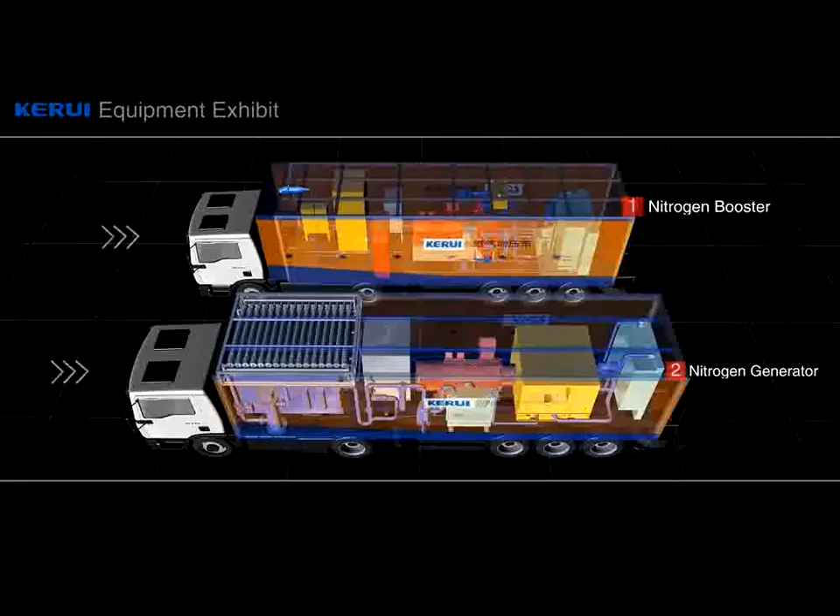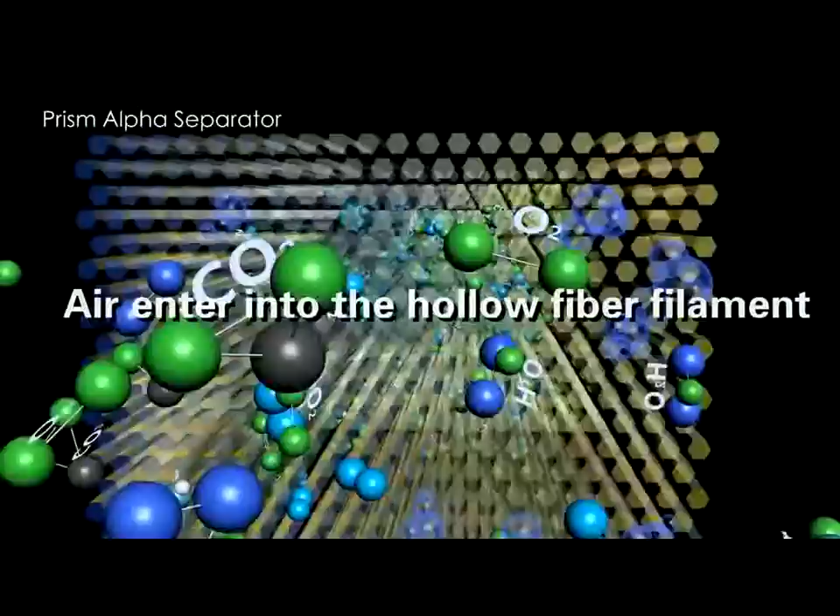Nitrogen generation is realized by means of membrane separation, using the difference in coefficient of solubility and diffusivity of various gases in the hollow fiber membrane to enrich nitrogen from the air. Then a booster pressurizes the nitrogen in certain purity and makes it ready for use.

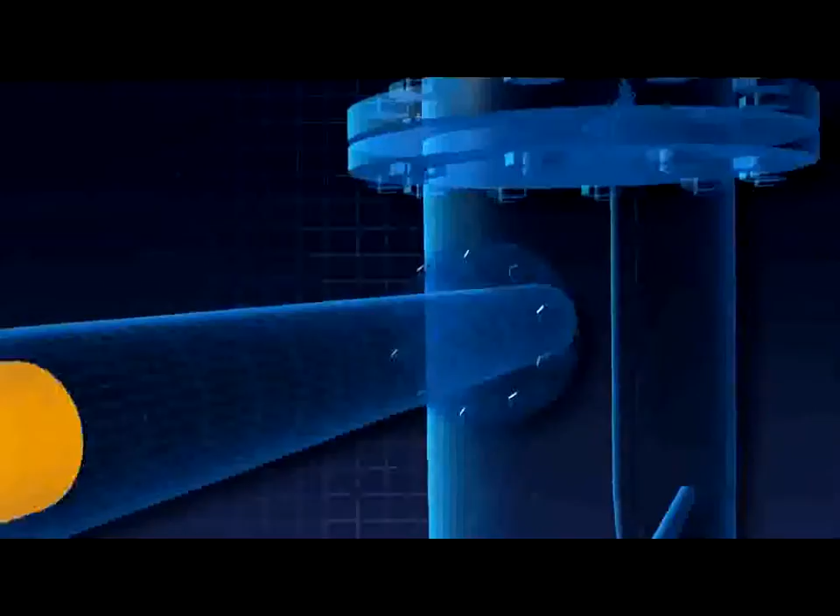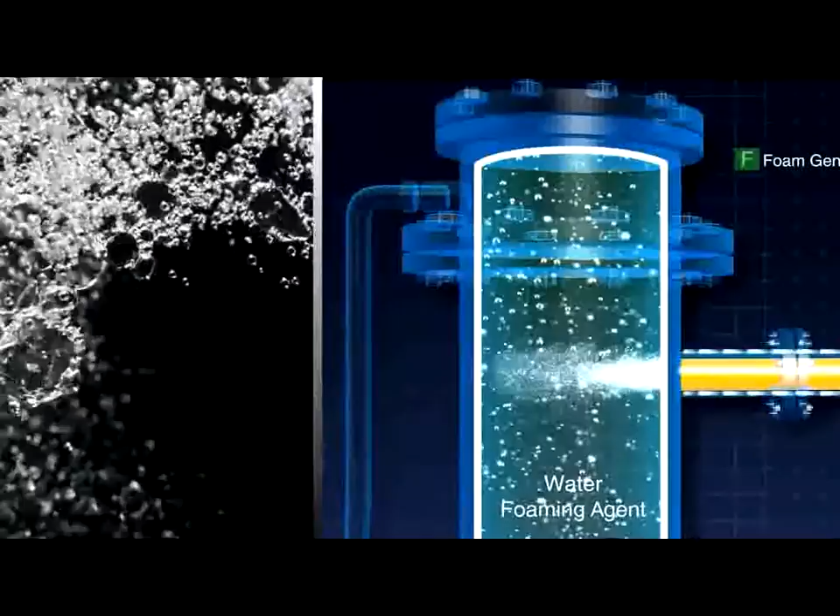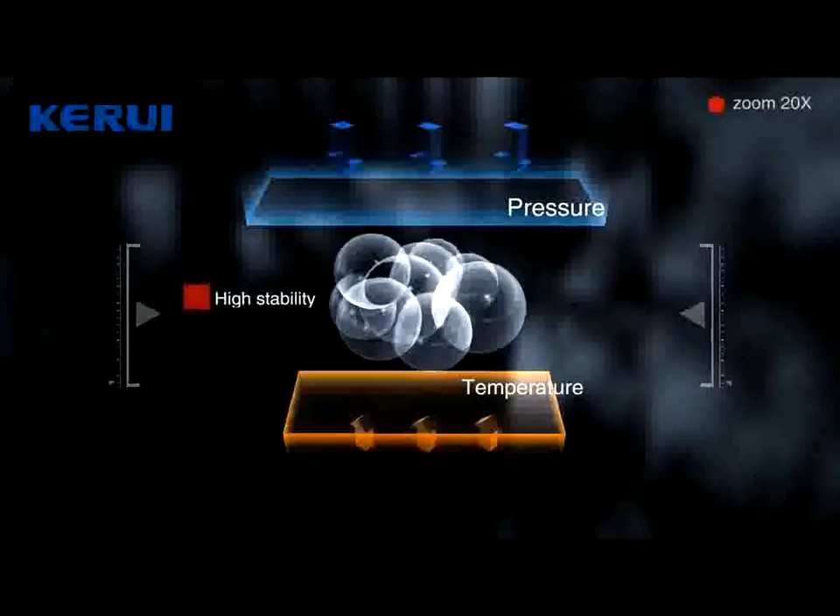High-pressure nitrogen and a foam solution are mixed by a foam generator, which forms a stable nitrogen foam liquid. Nitrogen foam liquid features adjustable density, high stability, little effect from normal temperature and pressure change, high viscosity, good cuttings transportation, shear thinning, and easier plugging of high permeability layers than lower ones.

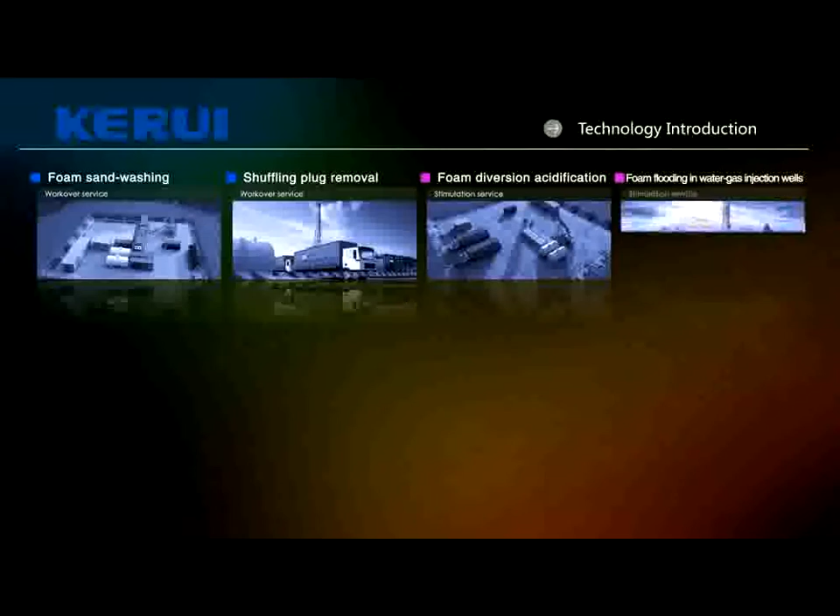Foam decomposes when mixed with oil and keeps stable with water. Easier plugging of water zone than oil zone. Widely used for flow-inducing, sand washing, plug removal, profile control of steam huff-puff well operation, flooding in water or gas injection, foam diversion acidification, underbalanced drilling, ground facility purging, and other field services.

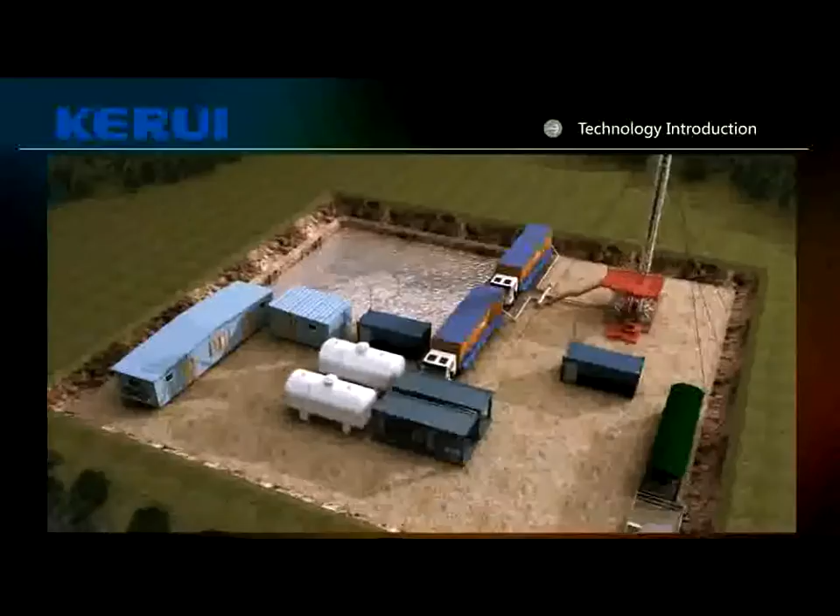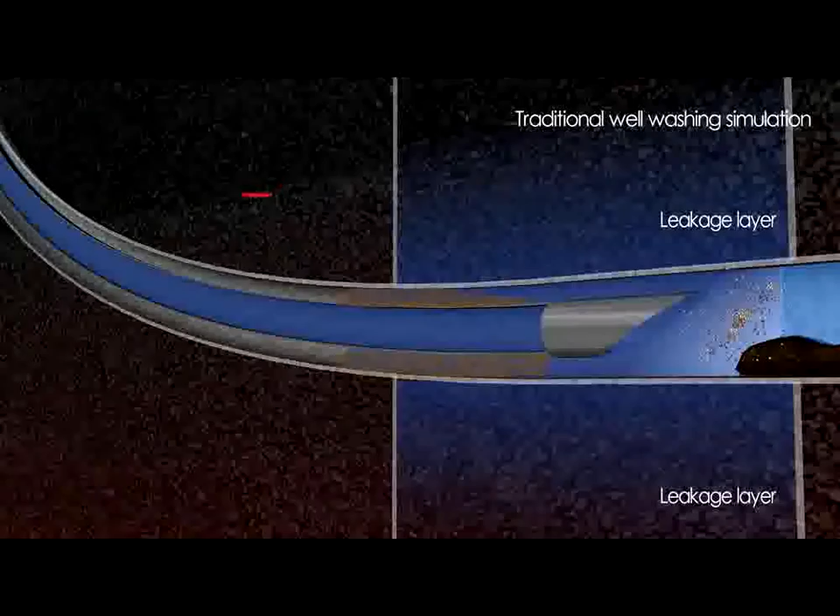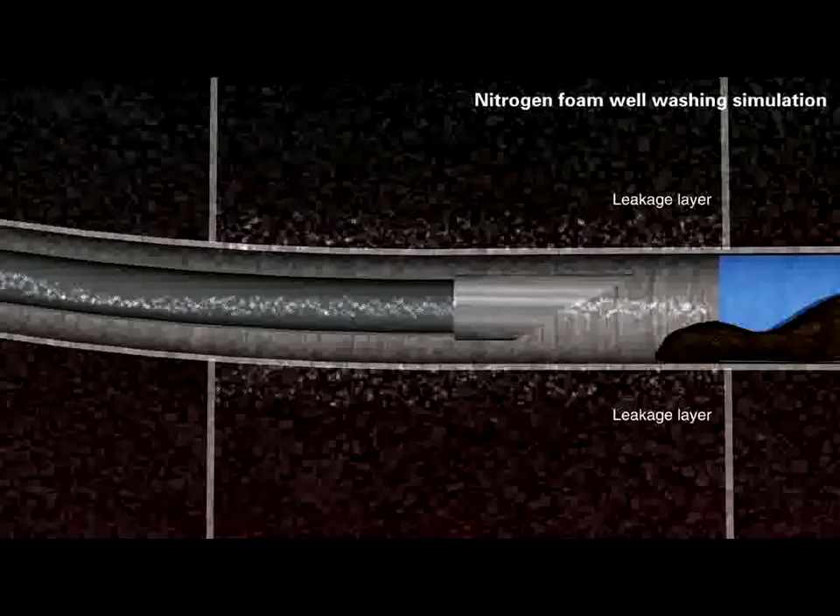Foam sand washing. Severe leakage occurs when using normal flushing liquid in wells with lower reservoir pressure, causing difficulty to establish flushing circulation and leading to sand sticking and other accidents easily. The density of foam fluid is low and easy to adjust. It can successfully establish flushing circulation in oil sleeve and result in less leakage and formation contamination.

The viscosity of foam fluid is high and the frictional resistance is low. The sand carrying capacity is 10 times that of clean water, carrying gravel out of the well bore completely, particularly suitable for horizontal wells sand washing.

Shuffling plug removal. During the exploitation of oil wells, impurities in the formation migrate into the near well bore with the formation fluid, producing blockage that blocks the oil flow channels and causes the decline of production.

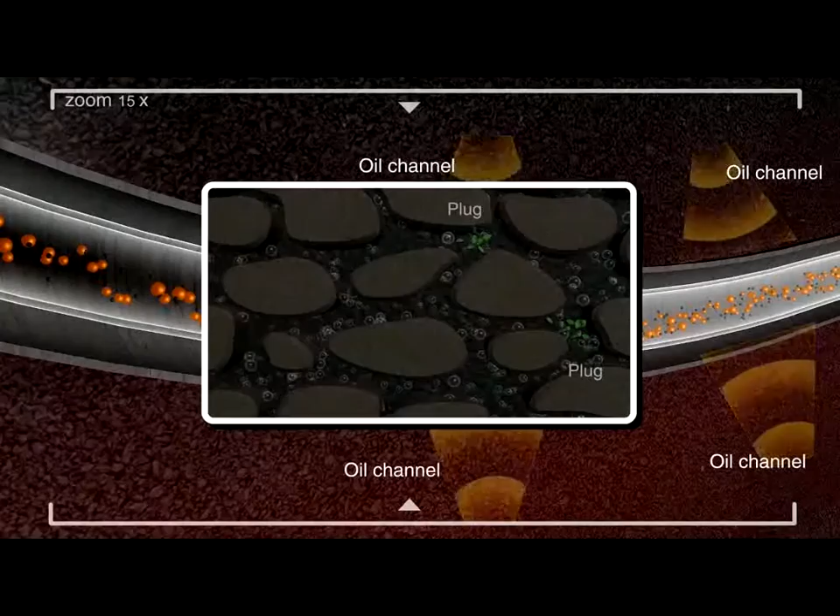Utilize the foam huff-puff and circulation shuffling technology and the low density of foam fluid to establish relative formation negative pressure in the bottom of the well, which could make the formation fluid spray at high speed. Discharge the blockage near the well bore and carry the contaminant out of the well bore using the strong carrying capability of the foam.

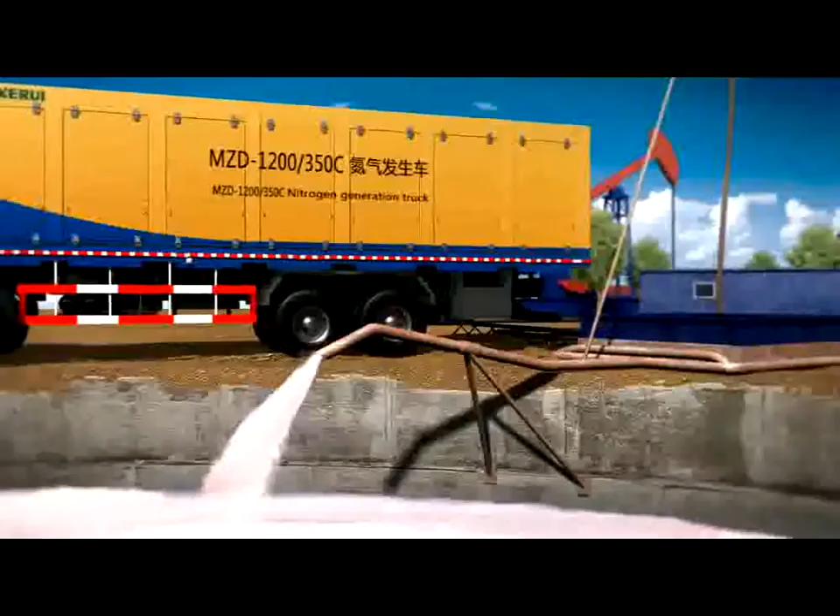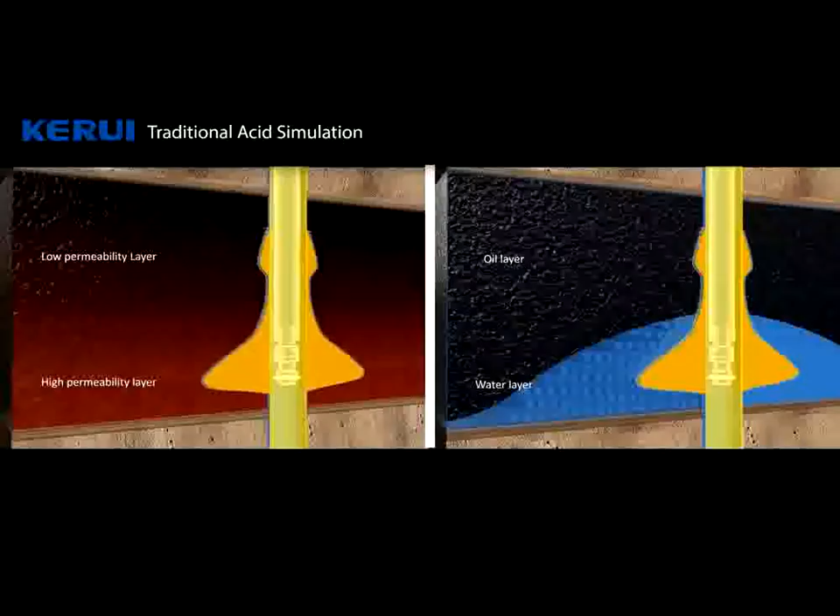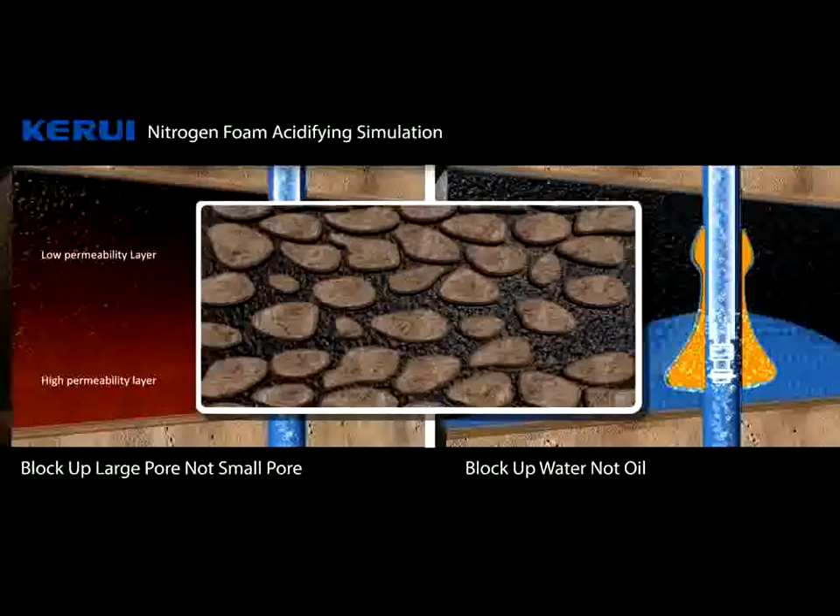Foam diversion acidification. The result of conventional acidification in heterogeneous formation, oil-water coexisting layers, re-acidizing and leakage wells is not satisfactory. Foamed acid has acidification capacity and foam characteristics simultaneously. Plugging big pores, not small pores. Plugging water, not oil. Be selective on different permeability formations and oil-water layers to achieve acid distribution and diversion acidizing.

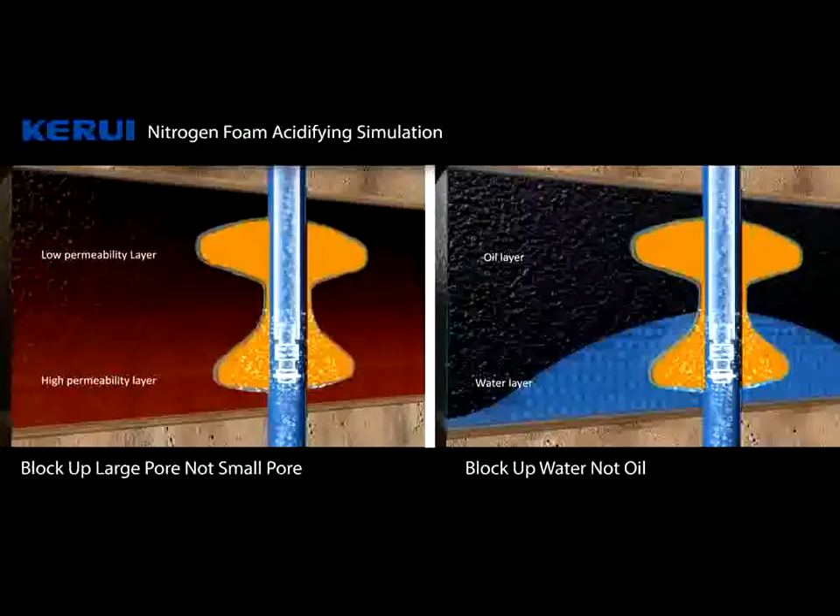The reaction speed of foamed acid acidizing is slow, which could realize reservoir deep acidification.

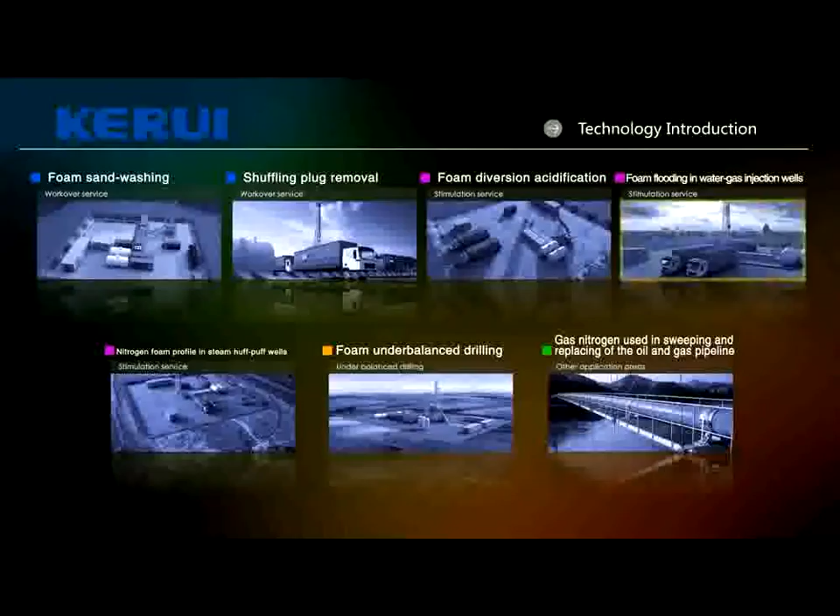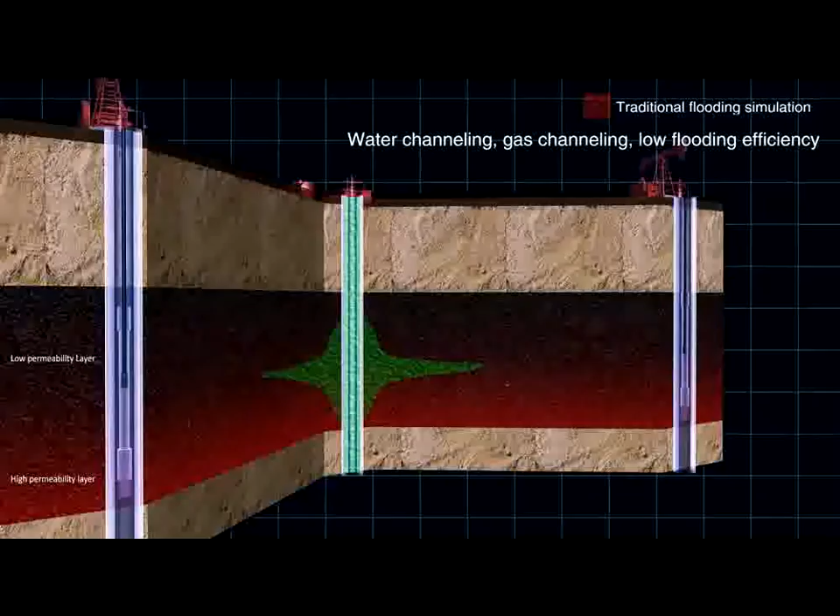Foam flooding in water gas injection wells. The traditional development of water gas injection is likely to cause water channeling, gas channeling, and low displacement efficiency due to the heterogeneity of the formation and the viscosity differences between water, gas, and reservoir oil.

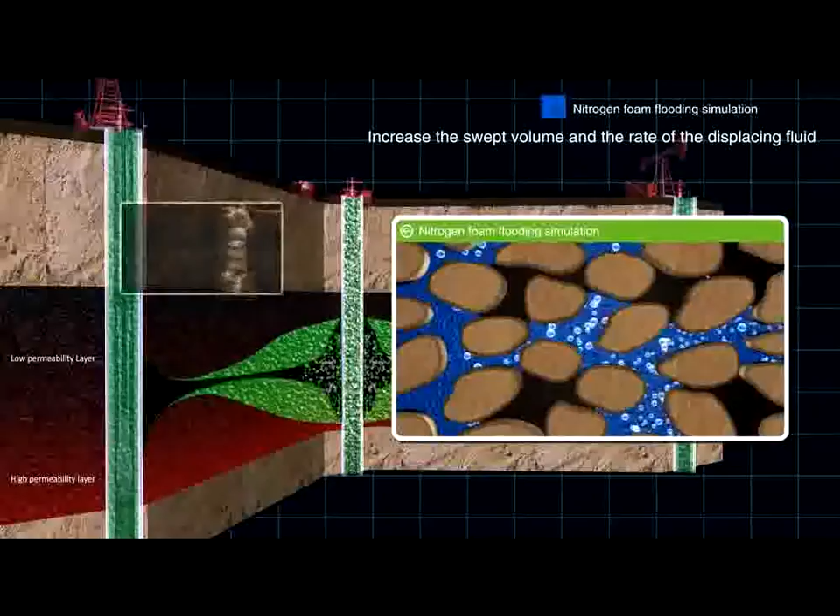Using nitrogen foam flooding can increase the swept volume and displacement efficiency, improve the oil-water mobility ratio, adjust the injection profile, and enlarge sweep volume. Foam defoams when it comes to oil and is stable when it comes to water. It can form a stable jam where the water saturation is high, not plugging the oil flow path.

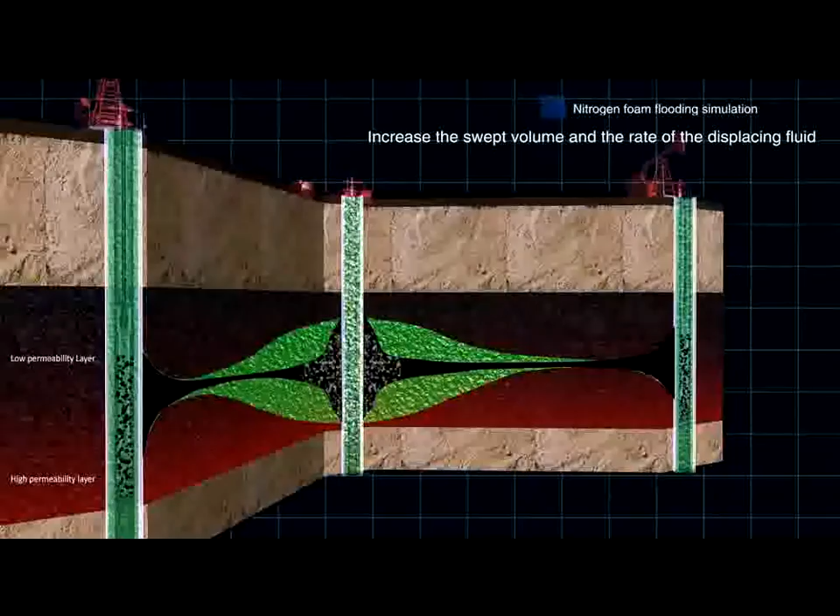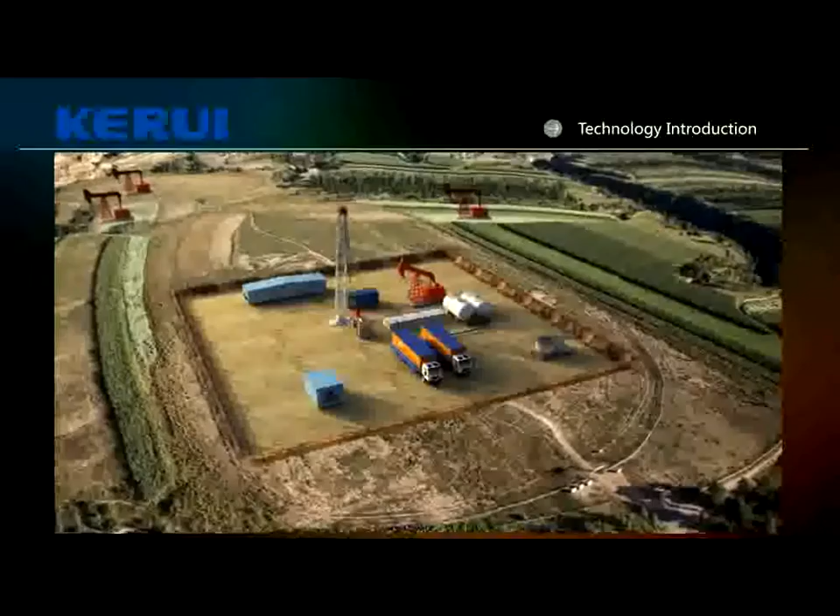Nitrogen foam profile control in steam huff-puff wells. Steam channeling is serious in heavy oil steam injection thermal recovery wells. Influenced by formation heterogeneity, the development effect of thermal recovery is bad due to steam overlay and low steam sweep efficiency.

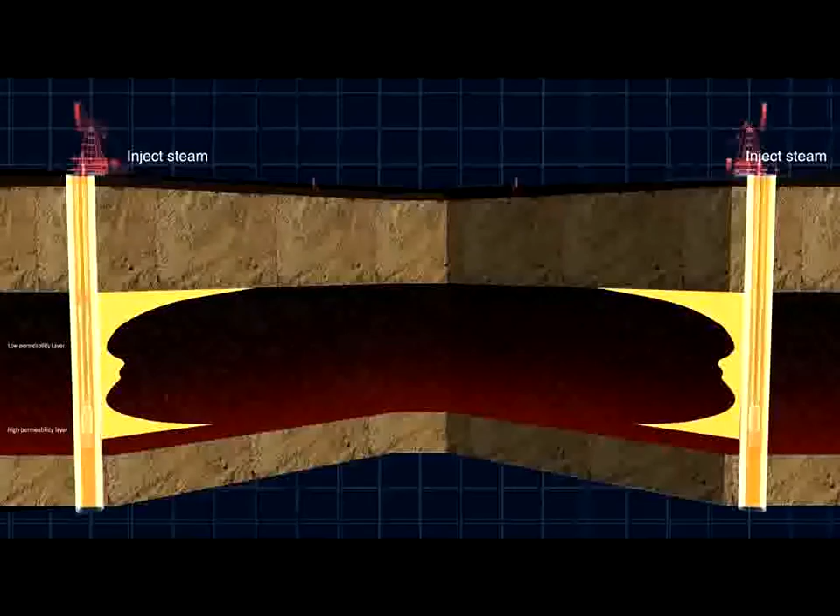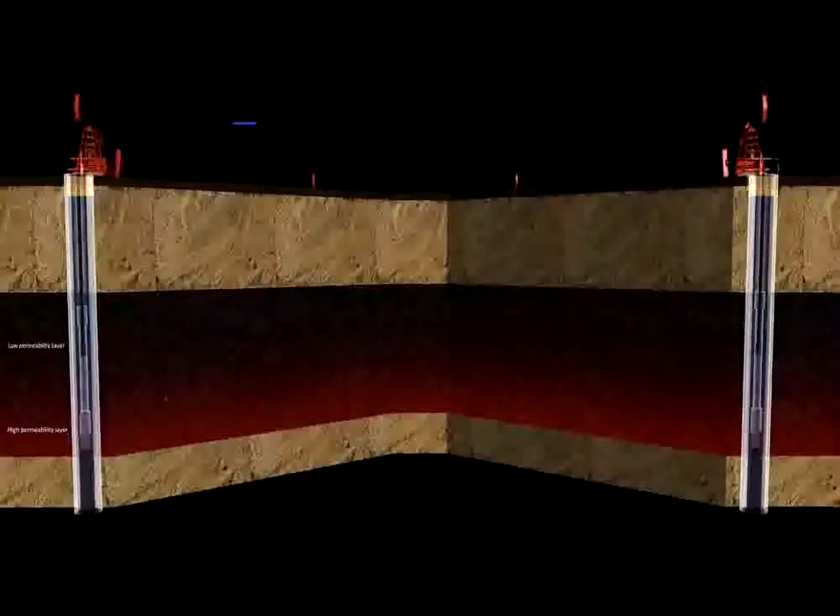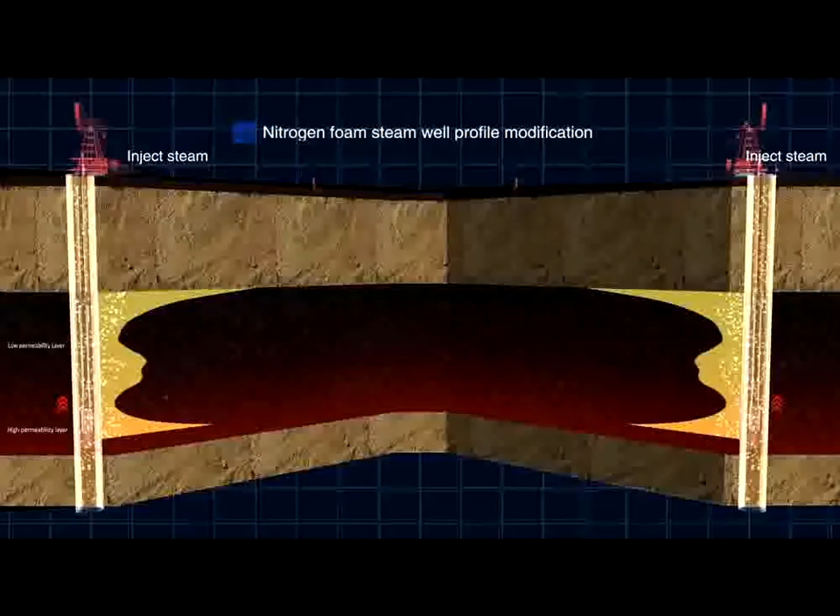Nitrogen foam forms a foam layer in the formation, which could reduce steam flow, improve steam injection pressure and steam swept volume, and efficiently resolve steam channeling and steam overlay. These could increase the steam injection of medium-low permeable layers and high oil saturation layers in order to make steam well distributed and improve the utilization of steam.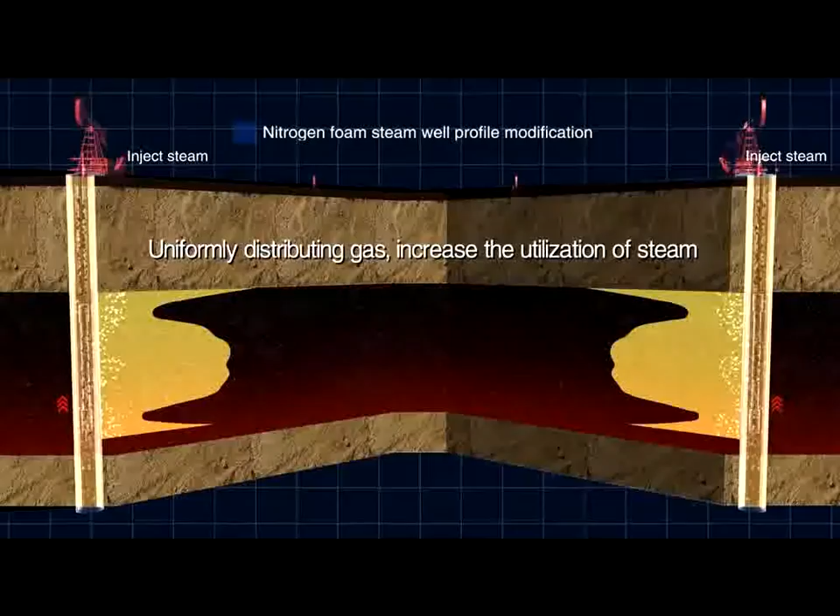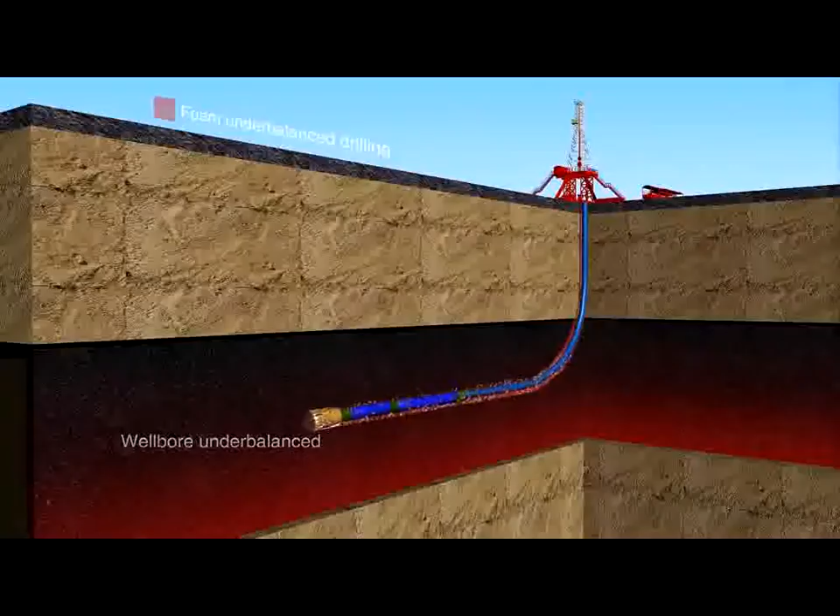Foam underbalanced drilling. Using foam underbalanced drilling makes it easy to adjust the gas-liquid ratio and achieve underbalance. The performance of the foam carrying property is good. In the condition of low speed of drilling fluid circulation, the performance of liquid and cuttings carrying is good.

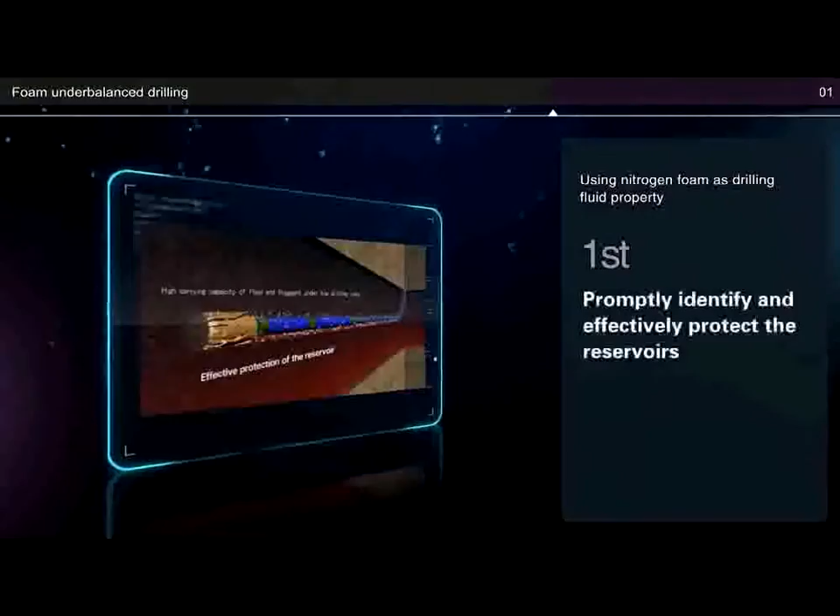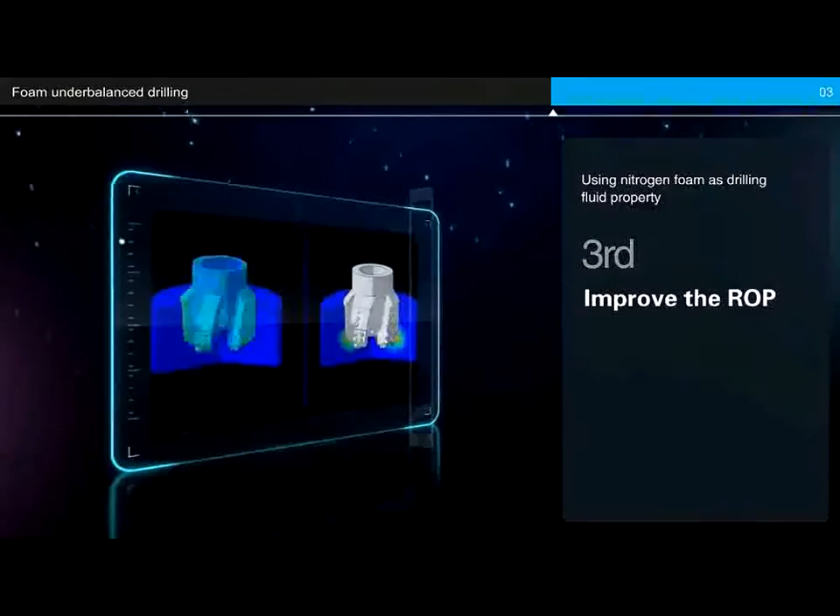Strengths: 1. Promptly identify and effectively protect the reservoirs. 2. Evaluate the reservoirs while drilling. 3. Improve the ROP. 4. Avoid lost circulation and prevent sticking and stuck drill. 5. Improve exploration efficiency as a whole.

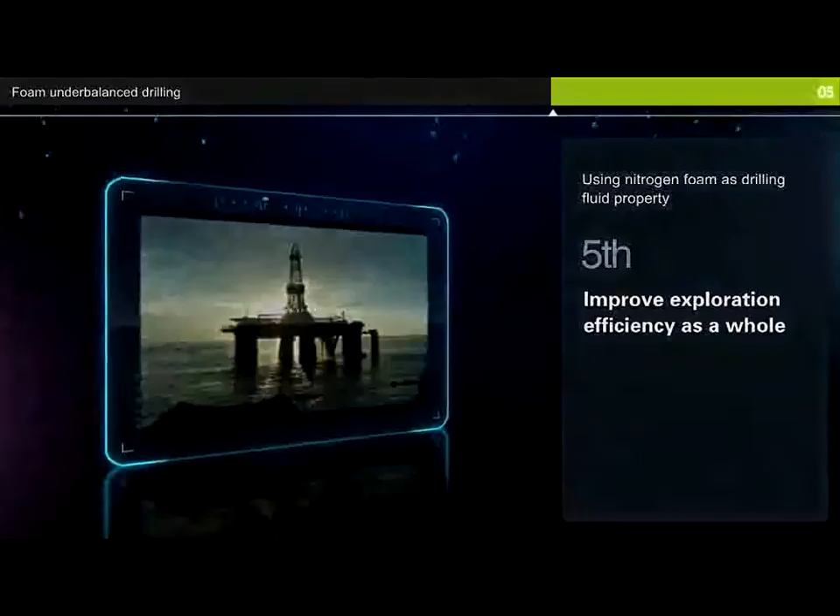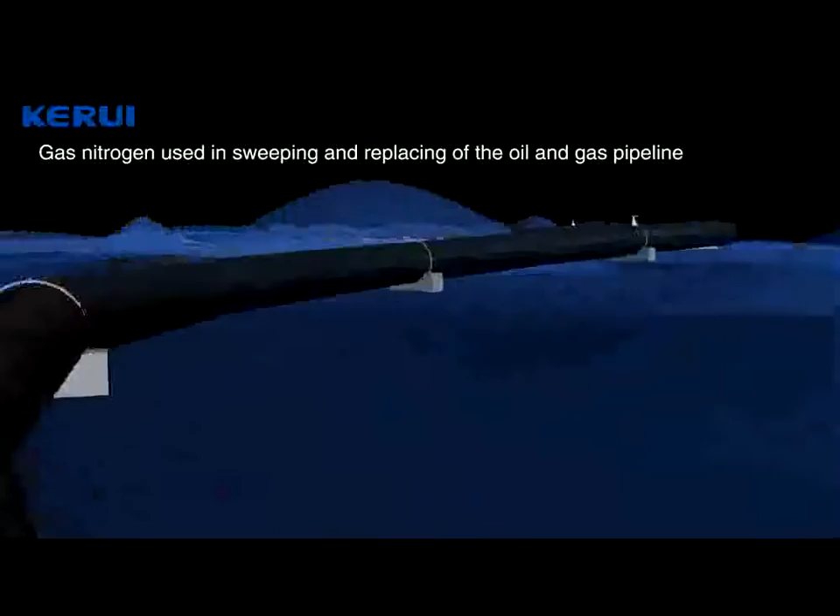Nitrogen can also be used in purging and replacing the pipeline of oil and natural gas. Widely used in low permeability oil field gas injection flooding and maintaining pressure production.